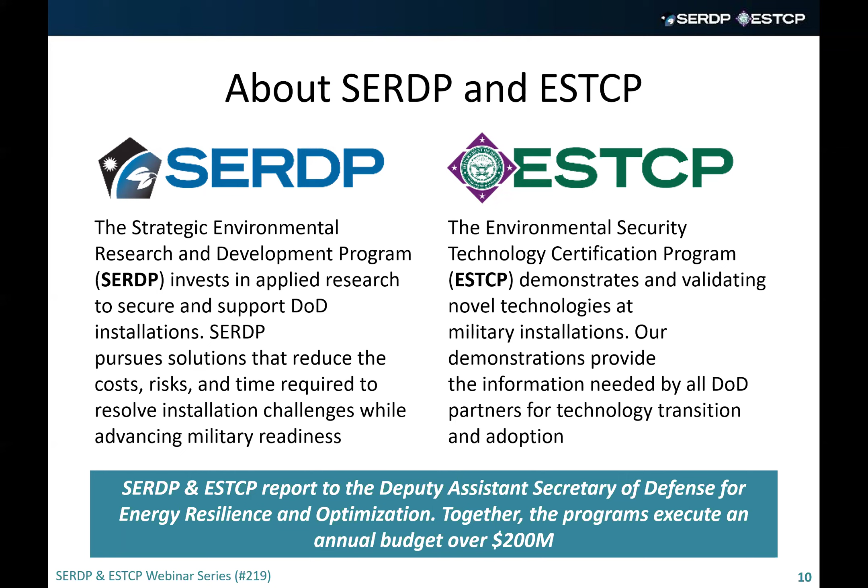SERDP and ESTCP report to the Deputy Assistant Secretary of Defense for Energy Resilience and Optimization, headquartered at the Pentagon. We work closely with other OSD programs, the services, and defense partners to facilitate the adoption of successful technologies. By fostering cross-program integration, we ensure that promising innovations do not remain isolated research efforts, but transition effectively into operational use. Our projects align with national security priorities and provide the data and capabilities that DoD leadership need to shape guidance and instruction aimed at securing our military installations.

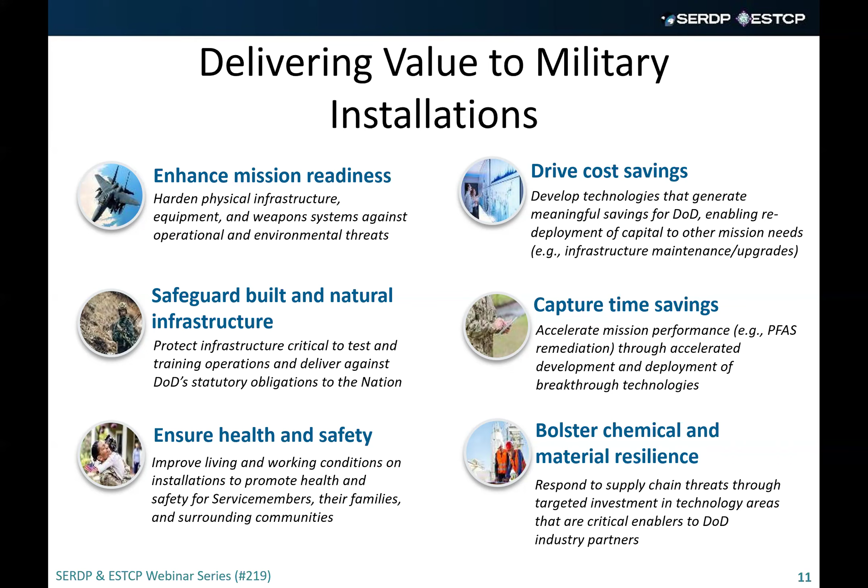Our science and technologies protect built and natural infrastructure, strengthen DoD chemical and material resilience, and ensure the health and safety of our warfighters. Our research portfolios are organized across 6 program areas. The Environmental Restoration Program area focuses on managing PFAS and other emerging chemicals of concern in the environment. The Resource Conservation and Resilience Program area focuses on sustaining the 28 million acres of DoD lands for test and training operations. The Weapons Systems and Platforms Program area that I manage focuses on strengthening DoD's long-term chemical and material resilience, extending the service life of mission-critical weapon systems and platforms while reducing costs and enhancing the safety and efficiency of military operations.

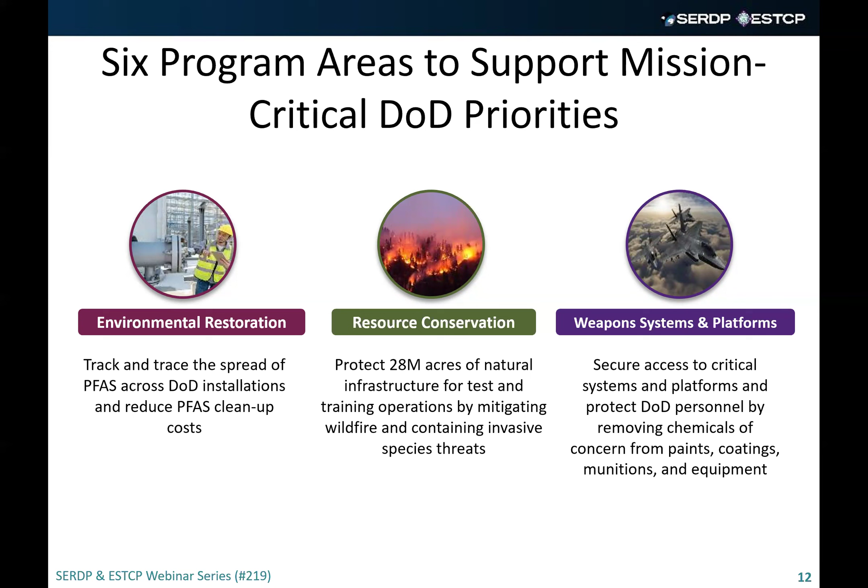The Installation Energy and Water Program area demonstrates and validates technologies that improve access to reliable and resilient sources of energy, providing greater flexibility in the control and delivery of power.

The Natural Hazards Adaptation Program area demonstrates technologies to ensure DoD installations can withstand and recover from events such as earthquakes, hurricanes, floods, and wildfires.

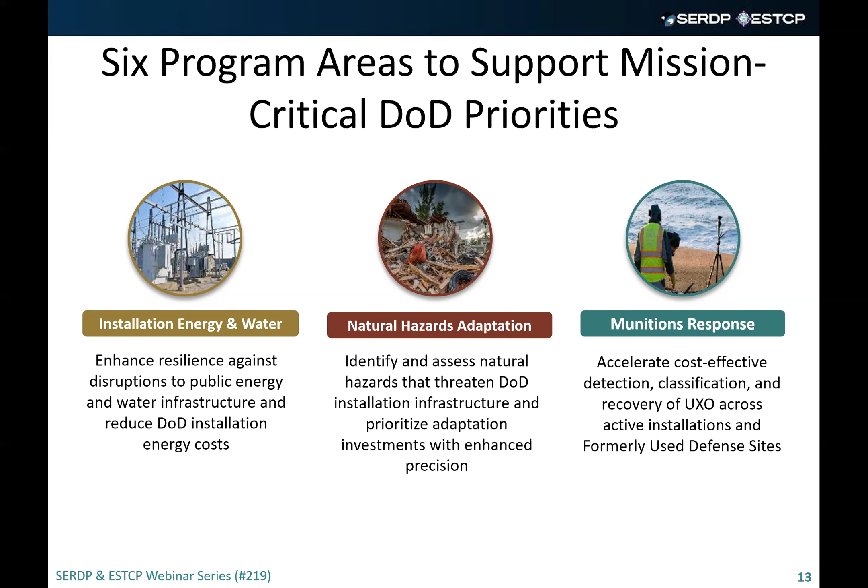Finally, the Munitions Response Program area focuses on unexploded ordnance in the underwater environment, including ponds, lakes, rivers, estuaries, and coastal ocean areas. After years of successful investment, this program area is currently transitioning technologies to end users through a series of test sites and live site demonstrations.

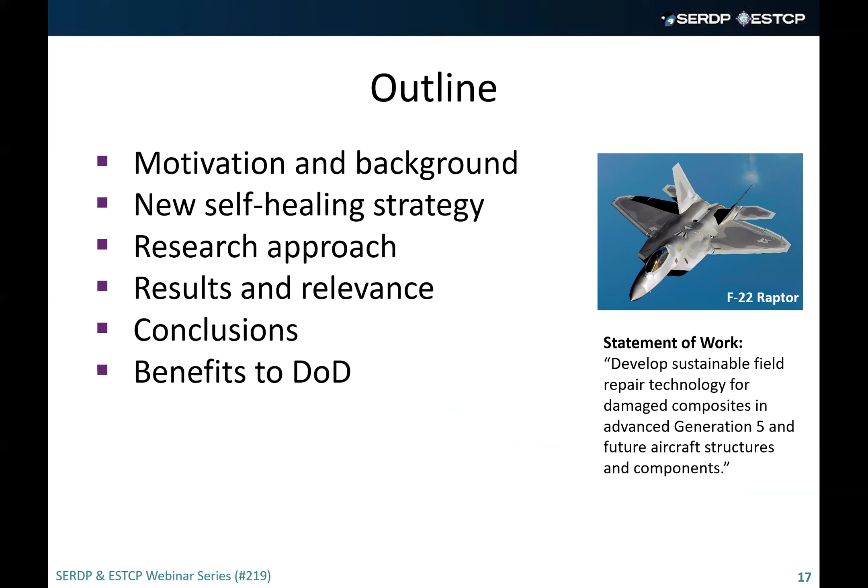And the statement of work for this project was really to develop sustainable field repair technology for damaged composites in advanced Gen 5 aircraft and also future aircraft structures and components.

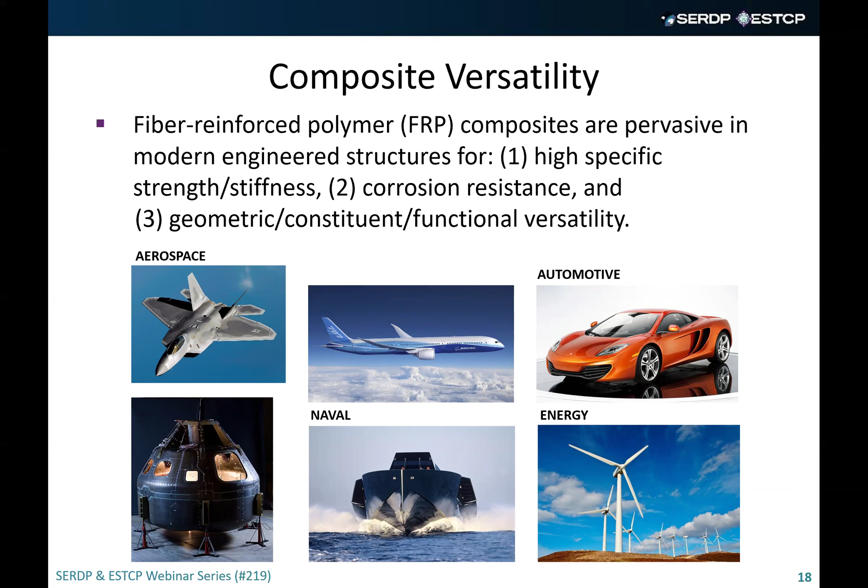As we know, composites are very versatile materials. They're pervasive in modern engineered structures due to their high specific strength stiffness, corrosion resistance, and geometric constituent functional versatility. You can see various applications here, including aerospace, military, commercial, naval, automotive, energy applications, and beyond.

Now, these hierarchical materials that leverage the inherent properties of the constituents to give mechanical advantage are also inherently susceptible to damage. I show a schematic here that highlights the various modes of damage at different scales, all the way from chemical debonding up to impact, puncture, and rupture on the high end.

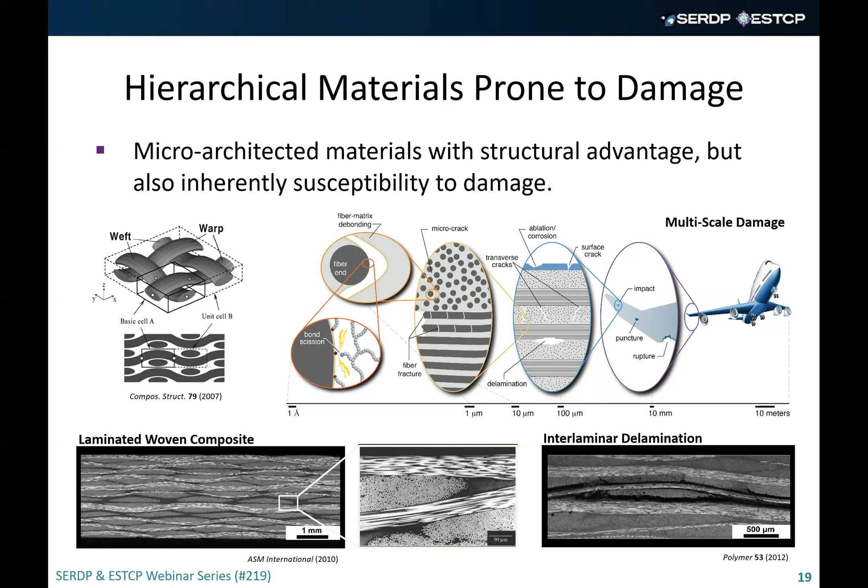We're really trying to address the issue of interlaminar delamination, or the separation of the reinforcement from the continuous matrix. I show a few images at the bottom of this slide. On the bottom left, showing a laminated woven composite, where you can see the nice layered structure. In the middle, you can see this hierarchical arrangement of bundles of fibers or tows in different orientations. And then this interlaminar delamination I speak of, where you have basically separation of the reinforcement from the matrix, or this adhesive debonding mode, which can be a critical factor in the lifetime of structural composites.

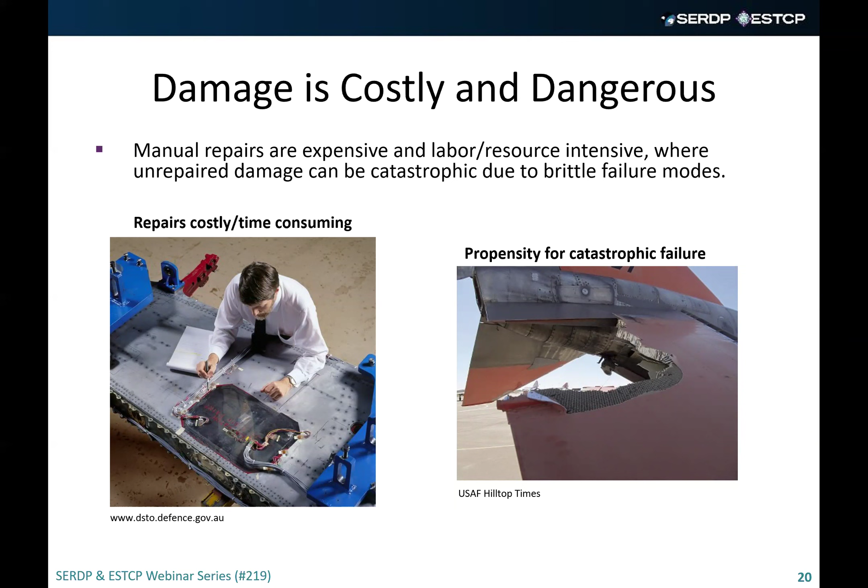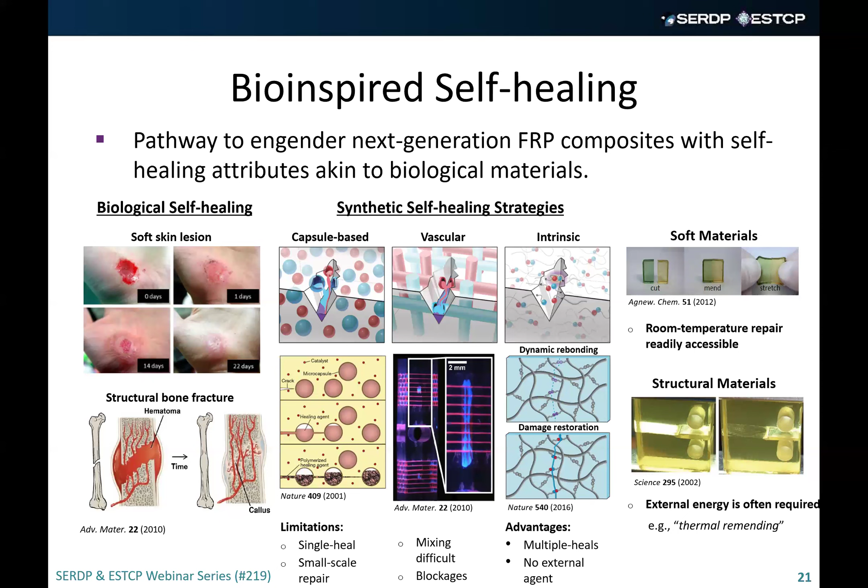So I'm going to highlight today a new thermal remending strategy that we came up with for fiber reinforced polymer composites.

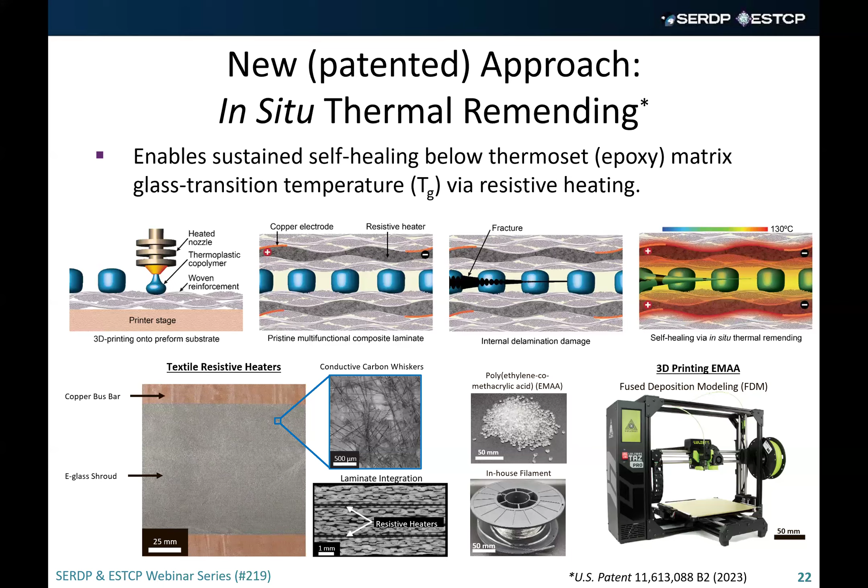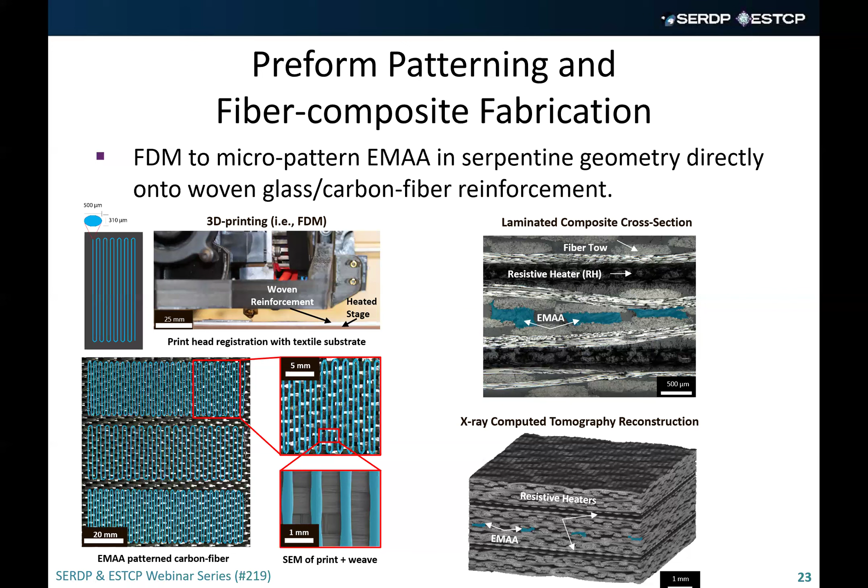I show an optical cross-section on the far right, where you can see that the EMAA incorporates quite nicely in between these tows of fibers. It actually displaces regions where matrix would occupy, so there's really no weight gain due to the EMAA in this system. You can also see the resistive heater interlayers incorporated, and below that is a 3D X-ray computed tomography reconstruction showing the entire laminate structure fabricated.

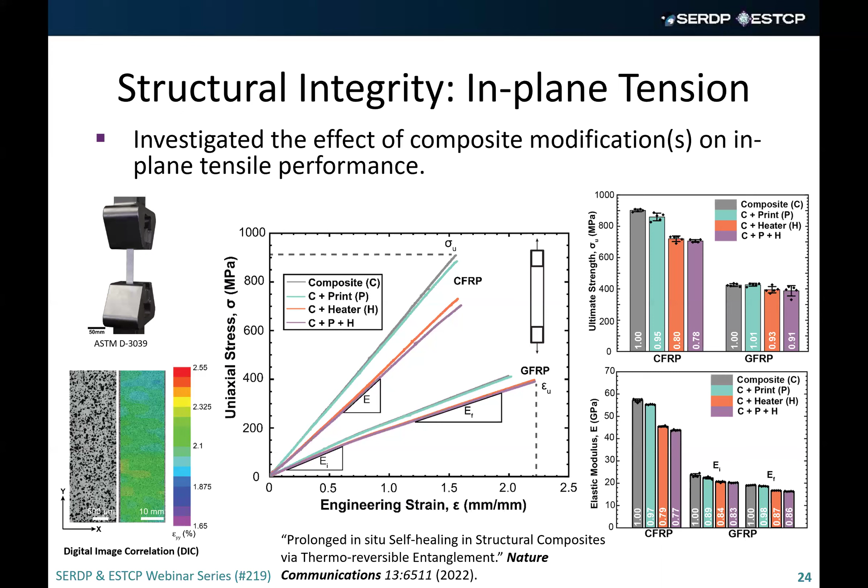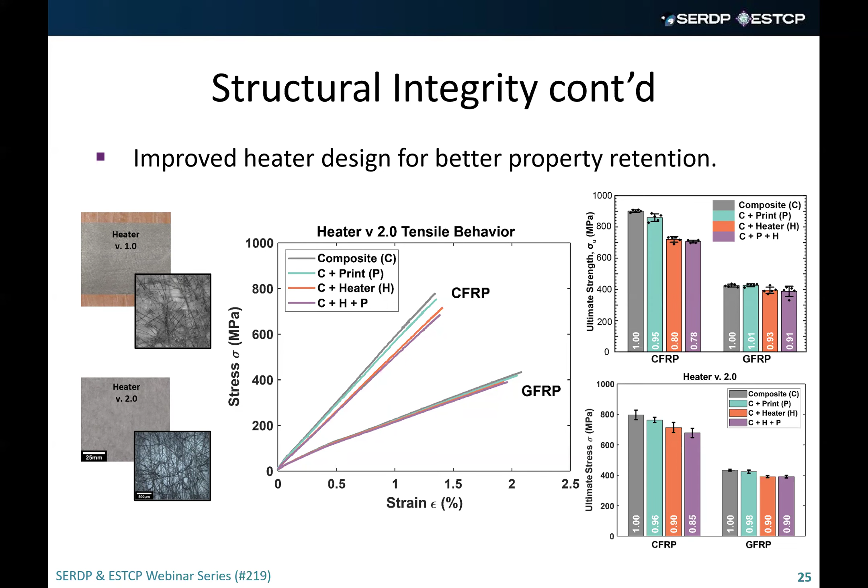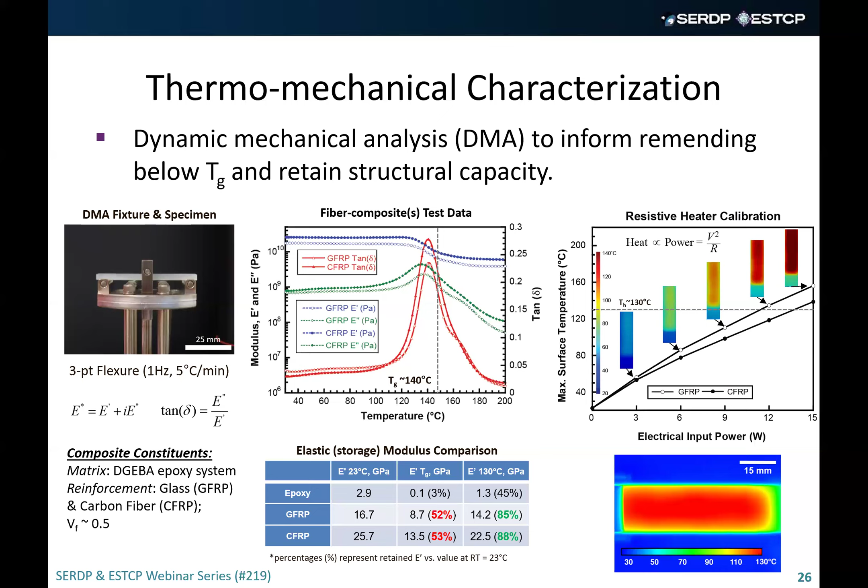We needed to calculate the amount of power that would be required for the heaters to get to that temperature, and that set the baseline. We did a series of investigations to show that at about 12 to 15 watts we could reach those power densities, somewhere around 1/5 of a 60-watt light bulb, to achieve that performance and still maintain structural integrity of that system.

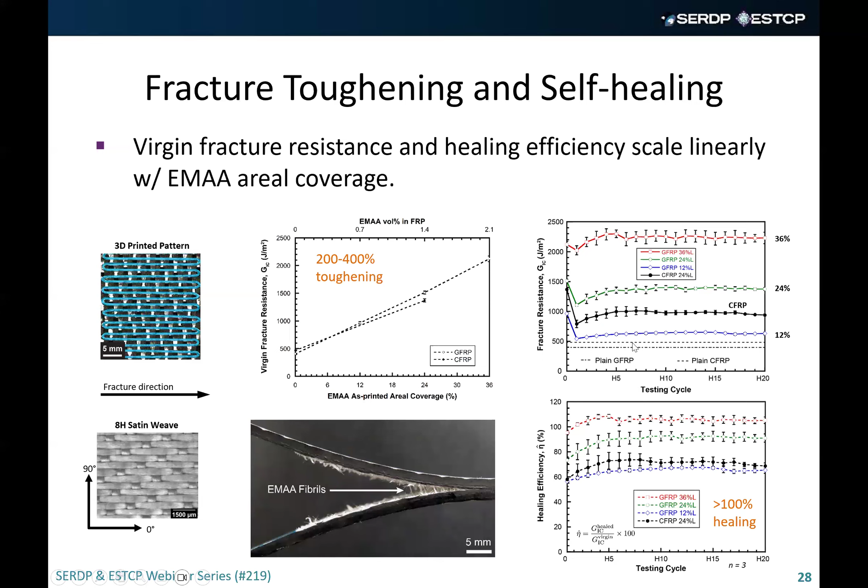We've compared different areal coverages on the right, and across 20 different repair cycles, we see very steady and reliable repair performance for this system—again, much higher than we'd see for plain glass or carbon composites, which are somewhere around 500 joules per meter squared.

If we look at that healing efficiency metric, the ratio of G1C healed to virgin, we can reach healing efficiencies upwards of 100%. And that's 100% on top of the 200 to 400% toughening we experience—a very well-controlled system that's reliable and provides repeatable repair performance.

We also looked at the effects of the pattern on crack propagation. We had these serpentine networks where we looked at both longitudinal and transverse orientations. We didn't see a large difference between the two patterns, except at the lower densities—this 12% areal coverage—where you can see evidence of stick-slip behavior, especially in the

transverse configuration. That's simply due to those EMAA traces providing resistance to crack propagation, and in some cases pinning the crack. But as you get to these denser patterns, the healing agent becomes more homogeneous in terms of crack propagation, so we don't see a huge difference.

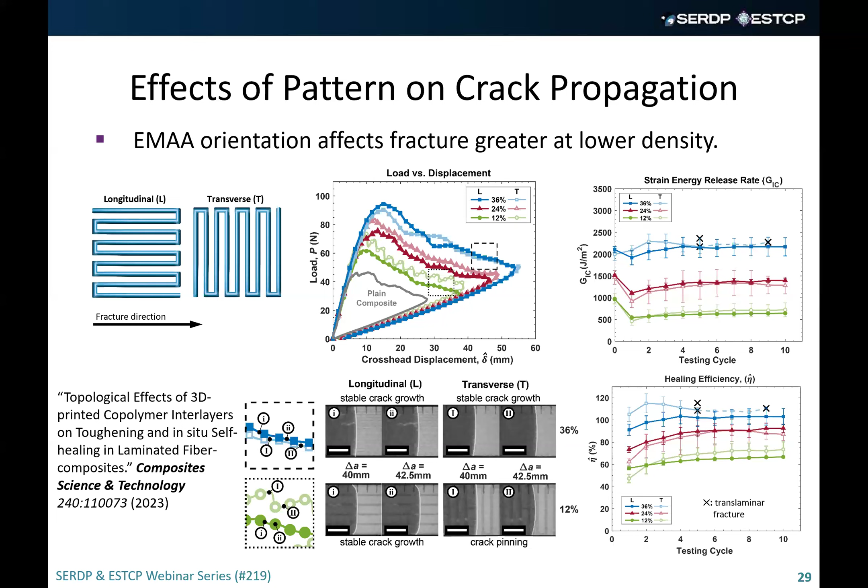I do want to note that, in the largest areal coverage—this 36% in the transverse configuration—we were actually able to shift the failure mode from an interlaminar delamination to a translaminar fracture, due to over-toughening that interface. So there's a limit to which we can toughen, at which point we may transition to different failure modes. But we can effectively suppress interlaminar delaminations with this technology, and understanding the limits of that is important to maintain structural integrity overall.

We also looked at the difference between glass and carbon fiber recovery, especially at this 24% case, or intermediate coverage. What we noticed was that glass fiber composite showed better recovery than carbon fiber.

We looked at a series of scanning electron microscope images of the crack plane. You can see some of the operant mechanisms—the inherent debonding from carbon and glass fibers, that brittle kind of adhesive debonding, versus the more ductile, tearing, cohesive type mode of the EMAA.

Interestingly, what we see is there's this formation and evolution of a microporous network in the EMAA, due to some condensation reactions during the epoxy cure, where water pockets are formed, and then during the healing cycles are vaporized and pressurize to form this microporous network that helps distribute the EMAA throughout the crack plane and provide additional coverage.

Now, interestingly, by heal cycle 20, we saw in carbon cessation of that microporous network, versus it still being present in the glass fiber composite.

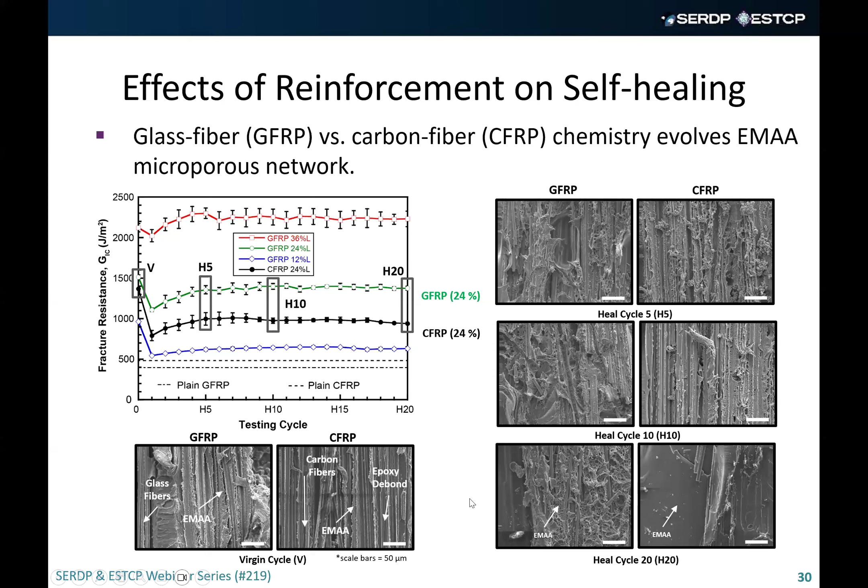And so we continued to cycle these samples up to 100 heal cycles. You can see all 100 traces here. Very, very repeatable performance and much higher recoveries and G1Cs compared to a plain composite.

And in comparison to existing self-healing composite technology at the time, this was an order of magnitude beyond cycles had been demonstrated. You can see how that healing efficiency increases and then slowly and steadily declines, apparently seeming to plateau at about 85%.

And we looked at the comparison between glass and carbon, and surprisingly, there was almost a constant difference between the evolution of those two.

Recoveries. And if we looked at scanning electron microscope images, by about heal cycle 40, we indeed saw cessation of that microporous network evolution, signifying that those interfacial chemical reactions ceased to occur at that point.

However, recovery was still possible through polymer chain entanglement of the healing agent itself, leading us to believe that this was a very robust technology and could be cycled even further.

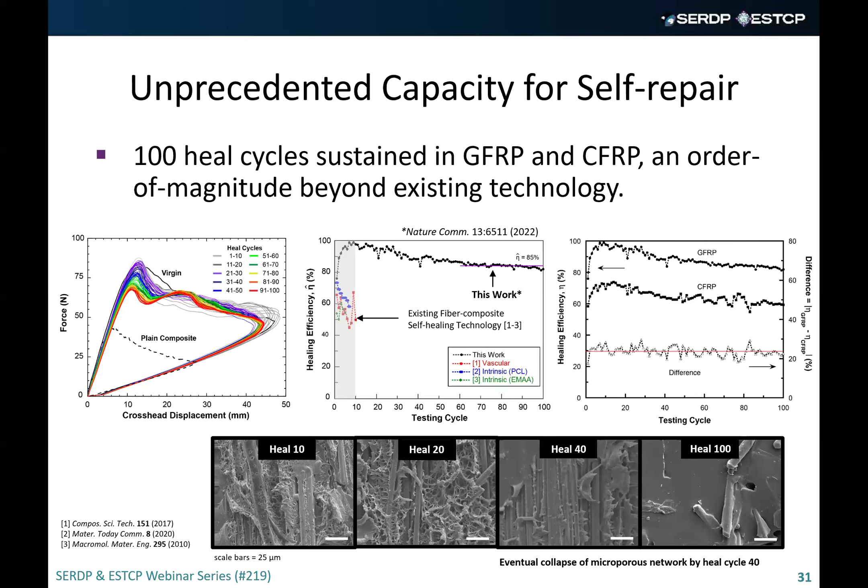And the 100 cycles were achieved with manual intervention. So we fully automated our experimental setup, where we integrated the thermoelectric mechanical performance and instrumentation and measurements.

But we decided to take a conservative approach and say, at which point do we have healing recoveries that match plain composite values, so we would never drop below allowables? And that's around cycle 500.

And if we take that cycle 500 and look at different repair or healing maintenance schedules, either quarterly, semi-annually, or annually, we can quickly observe that recovery and asset lifetime extension is on the order of centuries, which far exceeds design life of these structures.

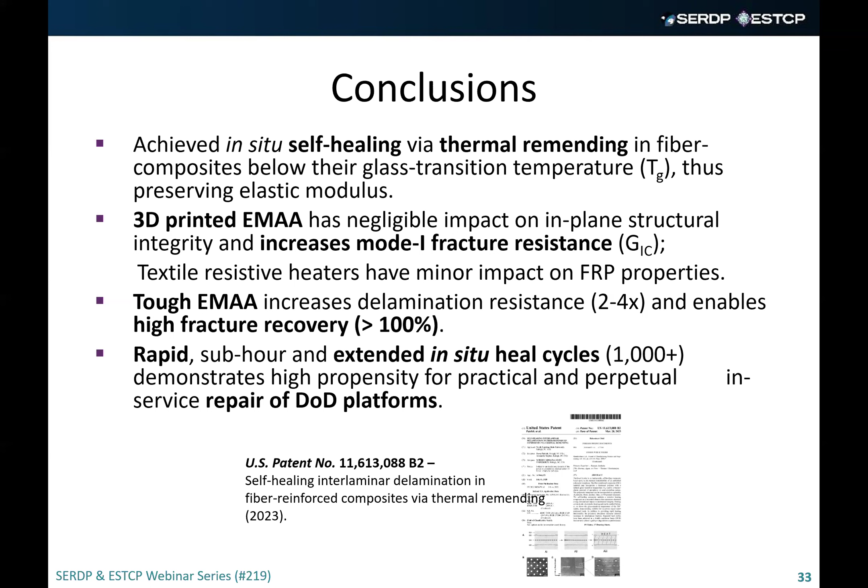The benefits to the DoD are safer, more resilient composite structures, requiring less manual maintenance, repair, and overhaul, which equals lower downtime. The healing technology is a sustainable approach, environmentally conscious by reducing waste, and we can also reduce overall lifetime costs, which result in overall savings for any composite platform out there.

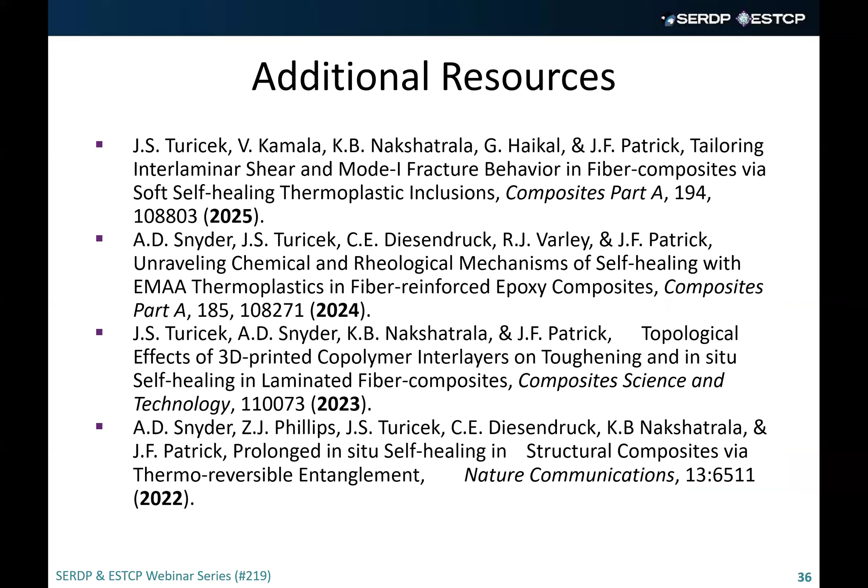And for additional information, please feel free to visit the website and contact me directly. I'd be happy to talk about this technology in detail and some further implements and additional areas that we're looking into. So with that, I'd like to thank you, and I'm happy to open the floor for any questions.

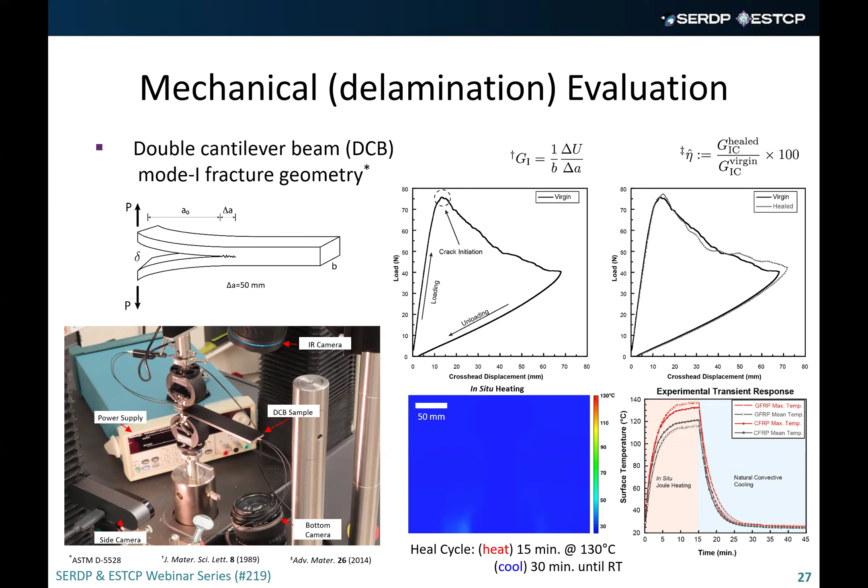Okay, great. And if we could now show slide 27. On slide 27, you showed the recovery rate after one healing cycle, but it looks like you also analyzed more cycles. So what were the recovery rates after more cycles, like 10 or 20? Yeah, so if you go to a later slide, I can give you that specific number where we show the 1,000 heal cycles. Let me pull that up real quick. Slide 32.

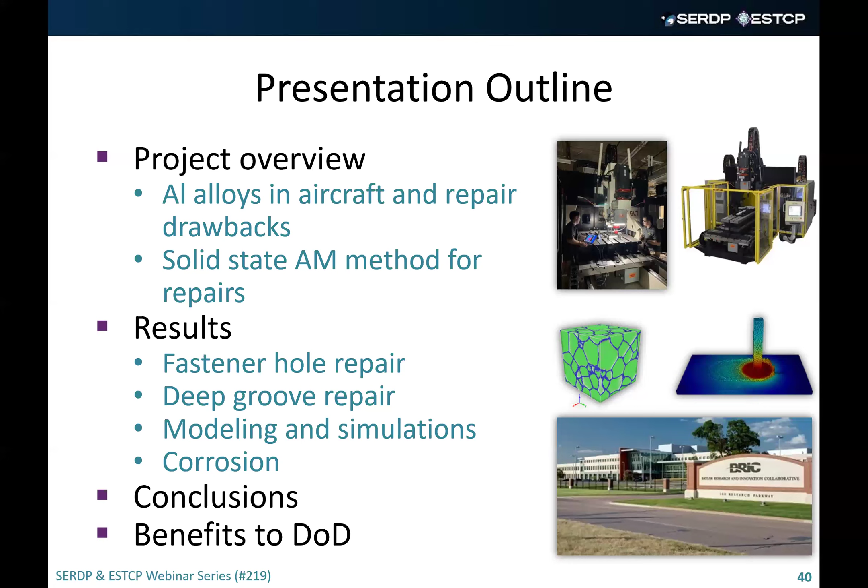If you're familiar with aircraft, in particular DoD assets, there are a number of structural components in fighter aircraft or even cargo planes that contain high-strength aluminum alloys, in particular 7000 series alloys. In this project, we've focused on 7050, a common high-strength aluminum alloy used in aircraft structures. These alloys have high strength, but well-documented weaknesses. In particular, they're susceptible to pitting, intergranular corrosion, and stress corrosion cracking.

Complicating matters, these 7000 series alloys, most of them, and in particular 7050, are considered unweldable. This is due to their alloying composition and chemistry.

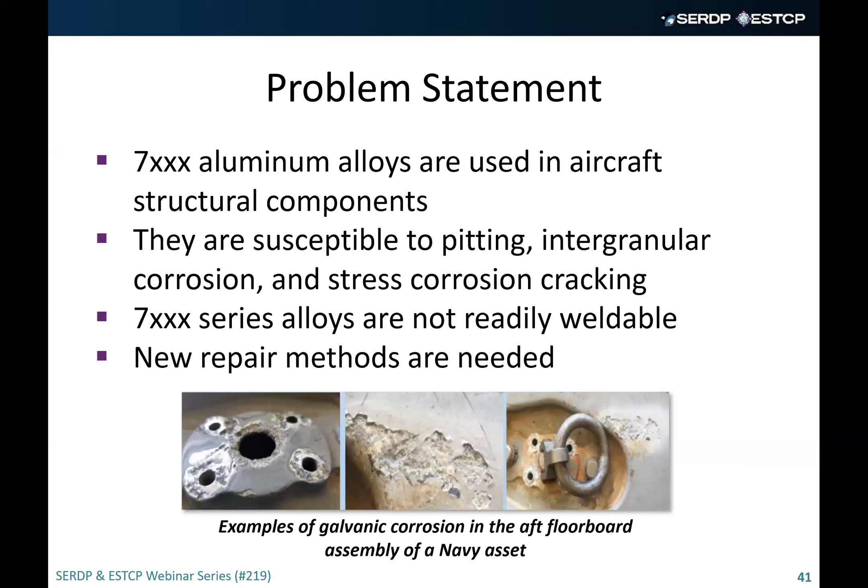Because of that, some repair methods are needed and are currently being explored. On this slide, some examples that our collaborators have shared with us highlight the potential problem and the devastation of corrosion on these high strength aluminum alloys. You can imagine Navy aircraft, for instance, operate in very harsh environments, so corrosion is something they need help addressing.

When you've got cracks, you can use techniques such as stop hole drilling. Again, this will retard crack growth, but you're not going to be able to replace loss of material. Other approaches involve composite patching, but this has a drawback in that it can impact the flight dynamics. Filler materials or epoxies can be used to fill in voids or loss of material, but this introduces the potential for FOD, foreign object debris.

When we talk about fastener holes, for instance, a common repair method is to use bushings to restore the geometry, but that has a limitation in how many times it can be used.

So we talk about how to repair aluminum alloys. Additive manufacturing is something that is an obvious choice, and over the last decade or so, additive manufacturing has advanced very significantly. But when we consider common AM processes, intense thermal gradients are involved. Usually, if we highlight selective laser melting, you're using a laser and melting powder together, so you've got intense thermal gradients.